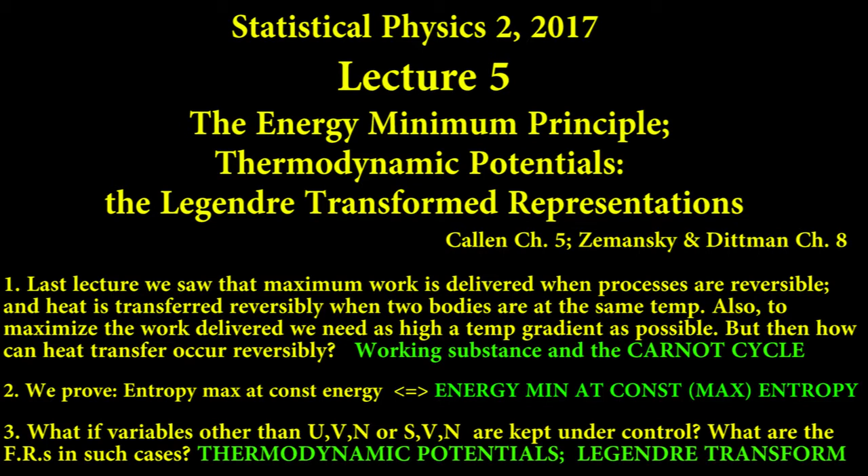Lecture 5 of our Introduction to Thermodynamics. Calling it an introduction, even though it's quite an advanced course. It's advanced in the sense that it's an advanced undergraduate course, but there's another level we could go up to, and there are a lot of interesting fundamental questions about thermodynamics that I don't really want to talk about in this course, because this is the first proper course in thermodynamics you're having. There are higher levels you can go up to, maybe 4th year level and grad school level, but you don't need that first off. What you need now is a nice orderly introduction that gives you the overview of thermodynamics, some feeling of how to use it, and some perspective.

So there are plenty of questions you can ask about almost everything we're doing, and thermodynamics is a very interesting, very difficult subject. Another thing is everything we're doing is equilibrium thermodynamics, and there are some very interesting recent results in non-equilibrium thermodynamics. Thermodynamics is alive and well as a research area.

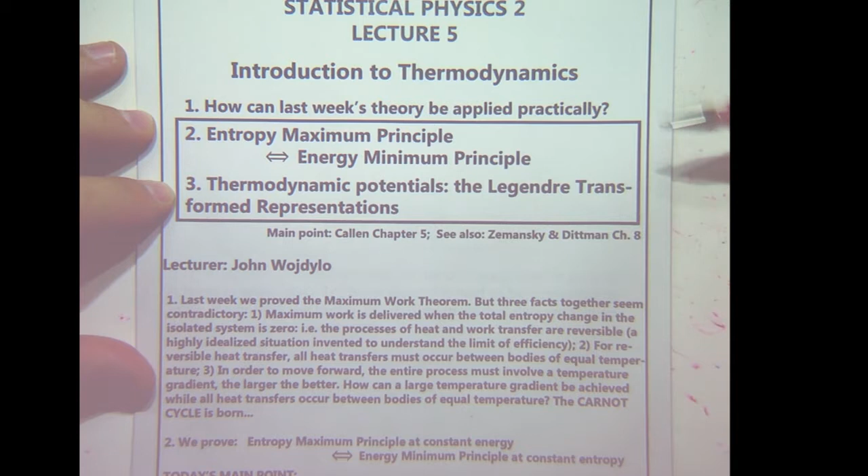So today we actually prove that, though we only prove it in one direction - the other direction, if you want to try it yourself, you can, but you just get the gist. The most important thing today, really fundamental for the rest of your working life in anything to do with thermodynamics, is thermodynamic potentials and the Legendre transform representations. So today we're doing Callen chapter 5, and for this first bit about last week's theory, there's an excellent chapter in Zemansky and Dittman on the traditional approach to thermodynamics from around the 1850s. That chapter also goes into Carathéodory's approach from 1909, which is highly non-traditional.

So just as an outline of today, let me talk about the first point. Last week we proved the maximum work theorem, but actually if you think about it, you might have thought there's something a bit strange happening, because there are three facts which, if you look at them together, seem to be contradictory.

Firstly, maximum work is delivered when the total entropy change in the isolated system is zero. What that means is that the processes of heat and work transfer that occur inside the system are reversible, where this idea of reversibility is a highly idealized situation invented to understand the limit of efficiency. So maximum work is delivered under reversible conditions.

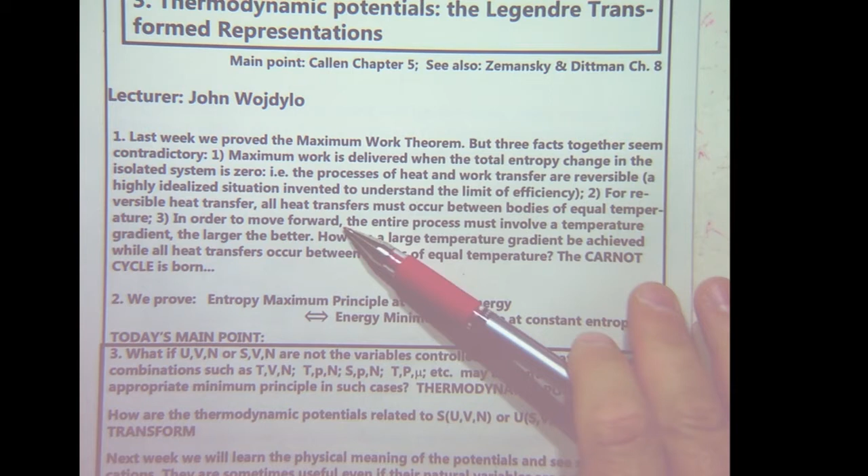The second point is, for reversible heat transfer, all heat transfer must occur between bodies of equal temperature or extremely close temperature - this idealized quasi-static transfer of heat. So, reversible heat transfer: we want maximum work to be delivered, so we want reversible heat transfer, and we want all heat transfers to occur between bodies of equal temperature.

And the last point is, if you just contemplated the efficiency equation we derived last week, you would have seen that in order to move forward, the entire process must involve a temperature gradient, and in fact, the larger the temperature gradient, the better the efficiency. How can a large temperature gradient be achieved while all heat transfers occur between bodies of equal temperature?

See, it sounds like a contradiction, doesn't it? So what's the way out of this? How do you solve this apparent contradiction? How do you resolve it?

Why is the Carnot cycle born? You've all done at least two thermodynamics courses so far.

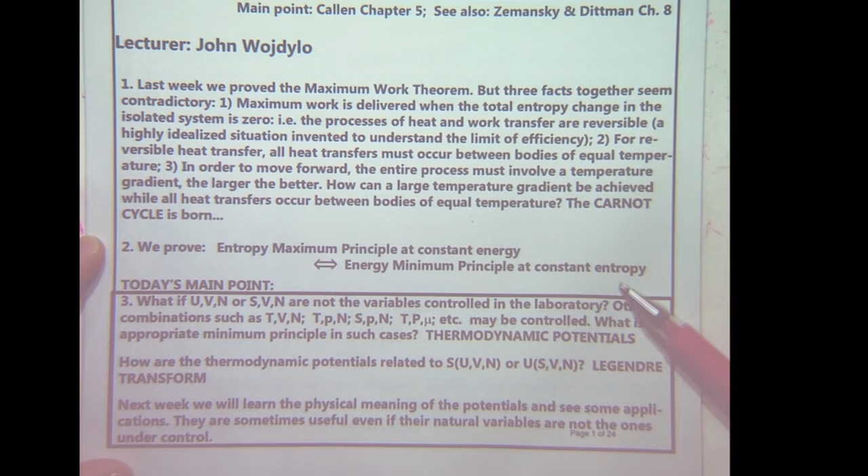Okay, so keep that in mind. Secondly, today we proved that the entropy maximum principle at constant energy is equivalent to an energy minimum principle at constant entropy. This is extremely important, and it's the foundation of the rest of this. The reason why all this works is this here, that there.

The important point today is: what if internal energy, volume, or number of moles of particles, or entropy, volume, or number of moles of particles, are not the variables controlled in the laboratory? What if some other combination is under control, such as temperature, volume, number of moles, or temperature, pressure, number of moles? If you do an experiment in the lab, this is the most common situation. This is also a very common situation.

Or entropy, pressure, number of moles, or temperature, pressure, chemical potential. This is also a common situation, because the chemical potential is often controlled by some kind of electrical field. You don't know any examples yet, but you will by the end of the semester, or in fact next semester, more next semester than this semester.

So what is the appropriate minimum principle in such cases? That's where the idea of thermodynamic potentials comes in. Professor, what do you mean by minimum? Minimum principle, energy minimum principle.

We know its initial state and we know its final state. In going between those two states, it delivers a certain amount of work to this idealized reversible work source, so there's no friction. We want a conservative system, like a Hamiltonian system. And here, there's energy delivered in the form of heat to a low temperature reversible heat source. So this is a hot body, this is a cold body. The reversible heat source is the condition that tells us what the temperature is going to be. Well, it's reversible.

In order for a process to be reversible, the total change in entropy must be 0. So heat must be transferred between the primary system and the reservoir when there is no temperature change.

There's still a contradiction, something missing in the picture. But there's nothing missing in the theory we've done. The theory we've done has ignored heat engines - we do not need heat engines to derive the big result.

But if you want to put the maximum work theorem into practice, like make the Industrial Revolution go better, then you need to put this into practice and think about heat engines.

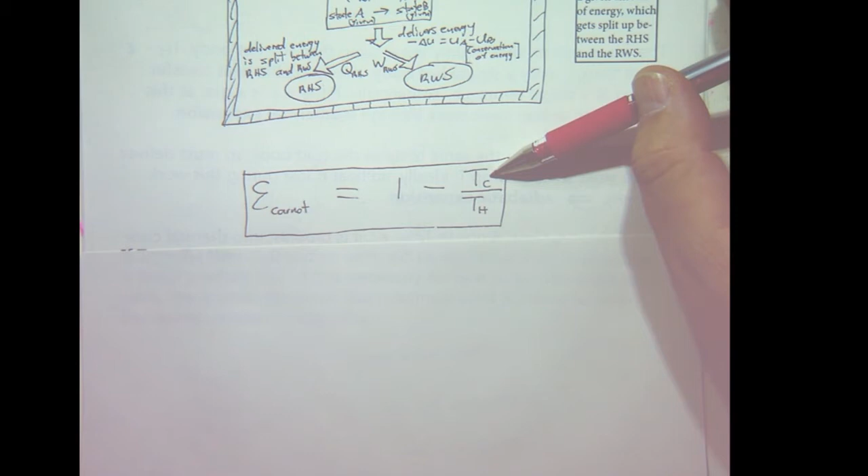So we derive the Carnot efficiency, and you see that if the temperature of the cold body equals the temperature of the hot body, the ratio is 1, and so the efficiency is 0 - it means you don't deliver any work. It's useless. But if the temperature gradient is big, meaning TH minus TC is large relative to TH, then you have a relatively large efficiency.

Okay, so as I've been saying, maximum work is delivered when the total change in entropy is 0.

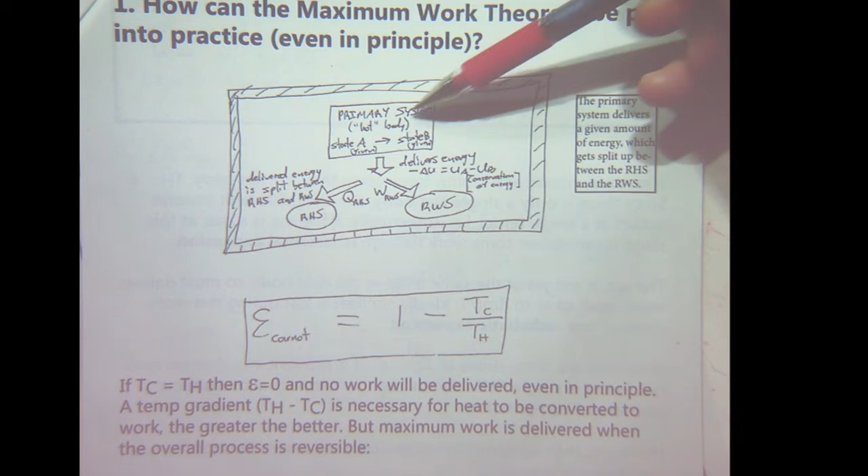How can the primary system deliver work maximally with its temperature decreasing after doing work? The primary system is meant to deliver work, so its energy decreases, and it's not drawing energy from anywhere - this is an isolated system.

While all heat transfers occur with two bodies at the same temperature for reversible heat transfer. But you just said that T cold and T hot are not the same - because the efficiency would be 0, and we actually want to transfer heat. So we need a big temperature gradient, yet we want all heat transfers to be between bodies at equal temperature. So how do you do that? But where did we get that point that they have to be of equal temperature?

Entropy change must be 0. And so the heat given - what we've seen is that there was an example last week where we had a hot body just put it in contact with a cold body in an isolated system, and the entropy is guaranteed to increase.

That's a challenge question, right? So if you just put that body in contact with that body, heat will flow, but there will be an increase in entropy, and there's no way you can make that reversible if there's a temperature gradient. So what do you do? What's missing?

This implies the existence of a third body or substance that acts as an intermediary between the hot body and the cold body. This substance is called the working fluid, or working substance, WS.

So what happens is that the working substance is initially at a slightly lower temperature than the hot body - we want this epsilon to be extremely small. Since there is only a single hot body, the reversible heat transfer occurs at a single temperature.

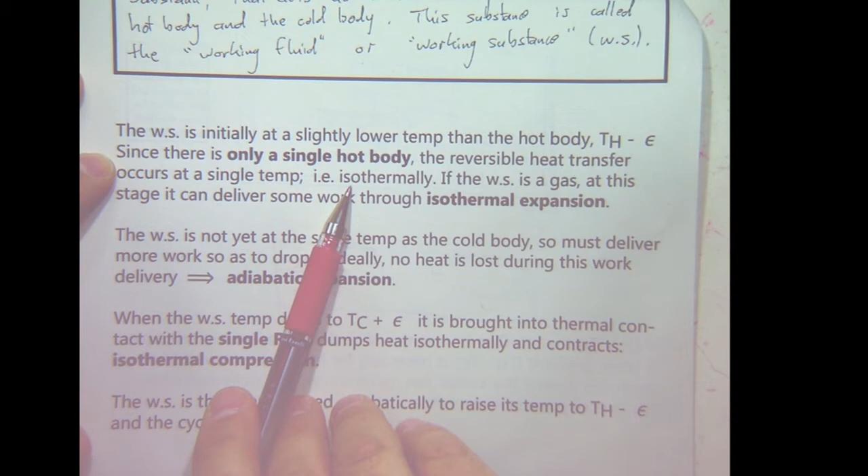And so it's isothermal. If the working substance is a gas, at this stage it can deliver some work through isothermal expansion.

So this substance, if it's a gas, let's say ideal gas, needs to absorb heat from the hot body, because eventually it's going to dump the heat into the cold body. That's the idea.

But if it's an ideal gas, then while it's absorbing heat, it will expand, and this expansion is able to do work. So in this case, there's an isothermal expansion.

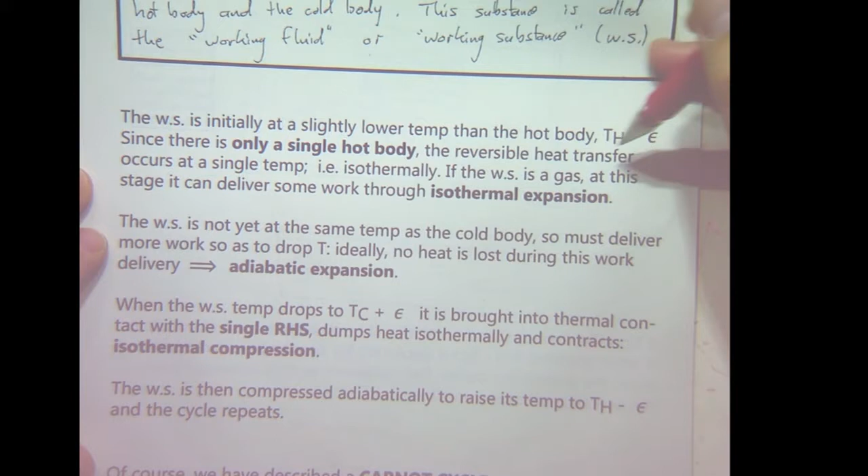Professor, why is it at a single temperature if its temperature is actually smaller than the hot body's?

I guess I'm saying the hot body is very large, so it's like a reservoir. Yes, the hot body must be large - it's assumed large, so its temperature doesn't change. So as long as the hot body is large, that means it's a heat reservoir.

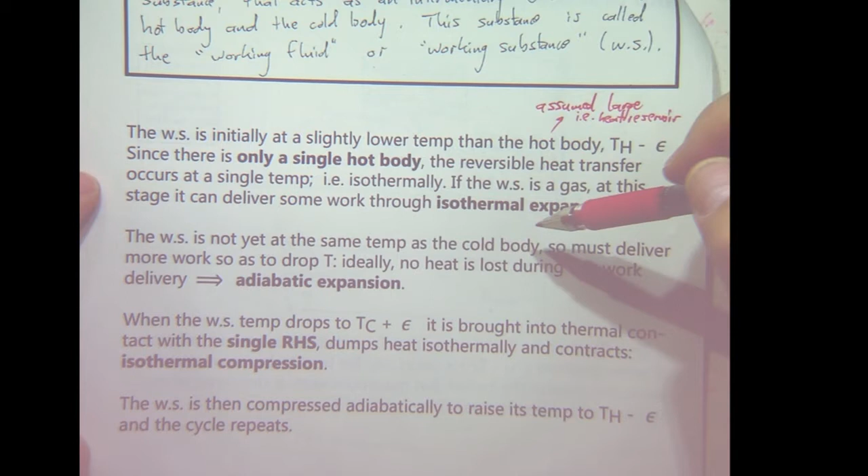Then the heat transfer occurs at a single temperature. And if it's an ideal gas, there will be isothermal expansion.

Now the working substance is not yet at the same temperature as the cold body - it has absorbed heat isothermally, and so in fact it's at the temperature of the hot body. So somehow its temperature has to be lowered. So how does it do that?

Well, it's got to deliver some work to drop its temperature, to drop its internal energy basically. But while it's delivering work, you don't want to lose any heat. So you want to use as much heat as possible and deliver it as work - you don't want to lose any heat. So in this step, you want an adiabatic expansion.

So you keep expanding adiabatically until the temperature reaches just very slightly above the temperature of the cold body.

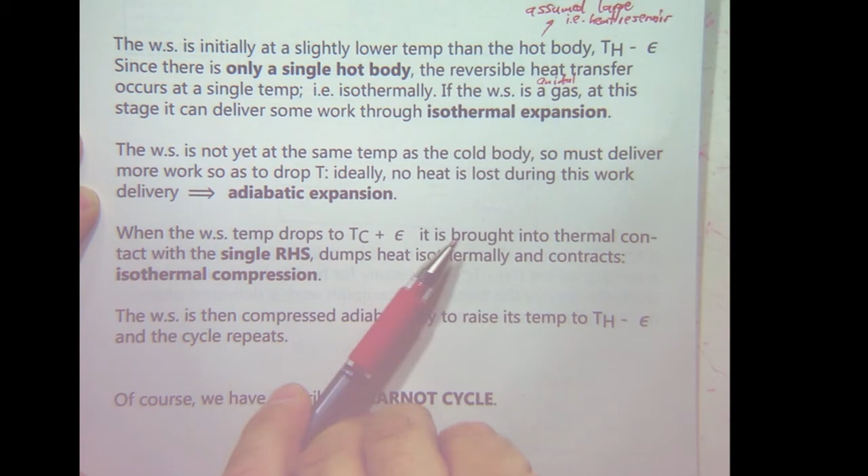You put the working substance in contact with the cold body, and it's a single reversible heat source, and let's say it's a large cold heat reservoir. So heat reservoir. The working substance dumps heat into the heat reservoir, but the heat reservoir is so big that its temperature doesn't change. So this happens isothermally, and if it's a gas, it would dump heat and it will contract. So you have isothermal compression.

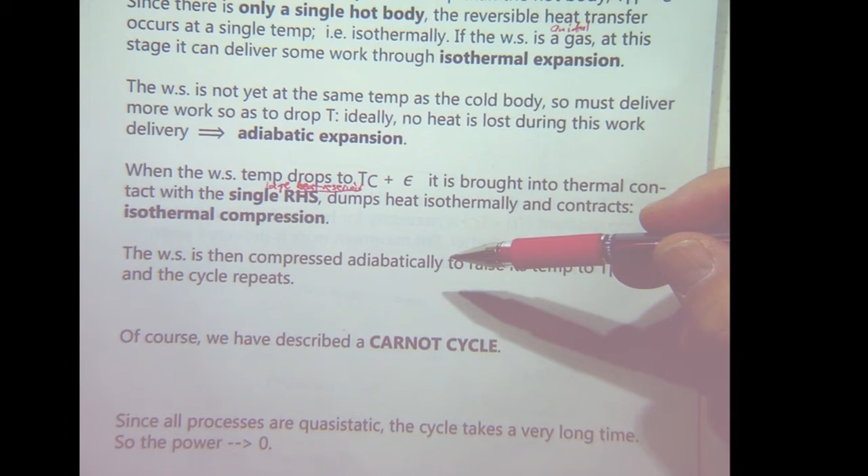And then the working substance is compressed further adiabatically to raise its temperature to the hot body's temperature. You've got to get the temperature of the working substance back up to the same temperature as the hot body, so you've got to do a little bit of work on it.

Can you explain again the process between the working substance and the cold reservoir? The single large heat reservoir, which is a reversible heat source.

Just assuming it's a gas, it's a PV diagram, sort of a gas of some molecules, an ideal gas. So it starts off at the same temperature as the hot body. This is isothermal heat absorption, and then it's got to drop its temperature to the temperature of the cold body, which will be down here. This is adiabatic, because you don't want to waste any heat.

Then you go up, isothermal. So it dumps heat in this step here - the working substance dumps heat into the cold reservoir. So the reversible heat source absorbs the heat from the working substance.

So it's a gas, so it will not expand. Oh well, you don't know what the reversible heat source is - it could be the environment, like the air. In fact, that's what it usually is.

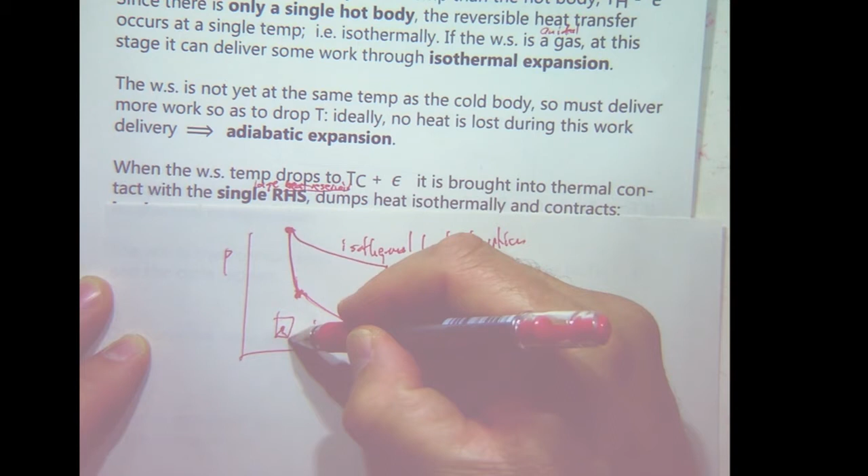Sorry, diesel - I think what happens with the diesel engine? It's been ages, I can't remember about engines, but I think the gas gets compressed and its temperature increases, and it's so hot that the spray just explodes. Yeah, that's diesel, whereas a petrol engine has got spark plugs. Yeah, I think it's something like that. I'm not very technically minded about motors.

Like, in a normal case, as you said, the reversible work system is the atmosphere or something? No, reversible heat source. So what's the reversible work source - is it the same as the working fluid?

It's like an idealized powertrain in your car. The cylinders go up and down, and they drive the crankshaft, and the crankshaft drives the axle or something, and the axle drives the wheels. If all that was frictionless, totally frictionless, it'd be like a reversible work source. The reversible work source is basically all the possible components that can do work, sort of lumped together in one conceptual unit. So this bit here, where the cylinder is compressed, would be a reversible work source, even though it's not the wheel.

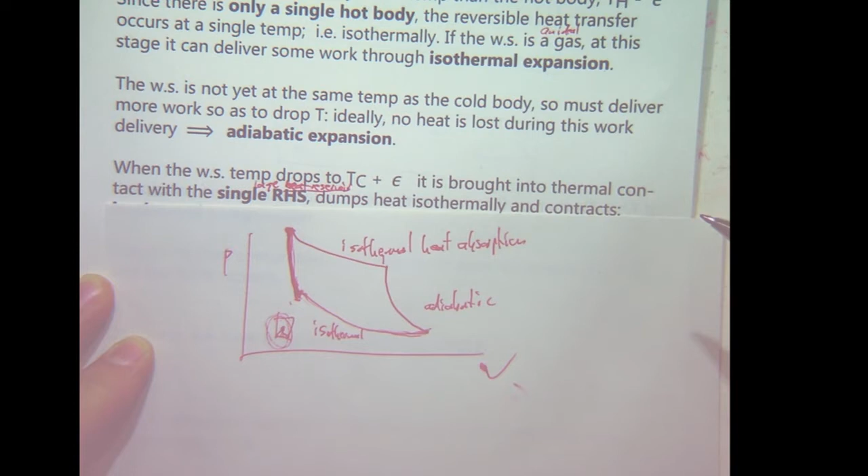And Professor, the adiabatic work that the working substance does, what does it do? On some machine, a cylinder or something? This one? Yeah. Well, it's expanding, so it's like a piston expanding - this is an expanding piston.

So it's delivering work - so it's the reversible work, in this case, delivering that to the reversible work source. As long as there's a positive, non-zero area enclosed, this is the work done - it's the area enclosed by the cycle.

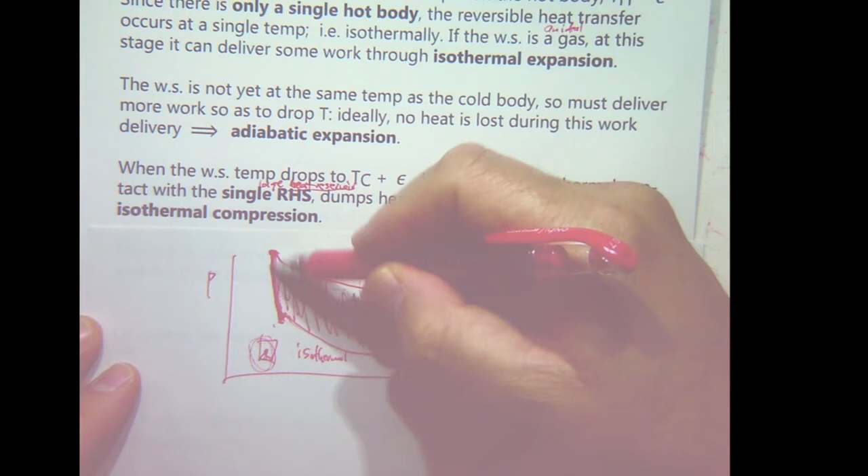So we have to do the compression - as in, we have to compress this one? Yes, this one. But yeah, something external has to compress the cylinder, for example.

So this is where... actually maybe it's a combination of the momentum of the car or something, and then... yeah, I'm not sure, I'm not exactly sure. There's many different ways of making it work. This is the principle, and there are thousands of ways, or hundreds of ways, of making it work. That's what these automotive engineering guys do.

Okay, and of course, what I've just described is a Carnot cycle.

If this was not a heat reservoir, if the hot body was not very big, or the cold body was not very big, then its temperature would change, and you would not have an isothermal process, but maybe some kind of other curve in the PV plane, not an isothermal.

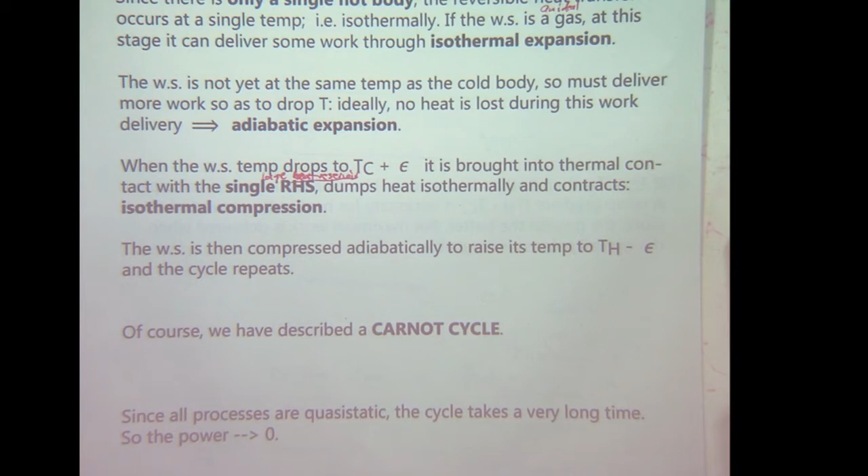And Professor, how do you know that the entropy change is zero plus zero? Because every heat transfer occurs at zero temperature difference there and there. So there's no entropy change in the isothermal process, and there's no entropy change in the adiabatic process because it's adiabatic.

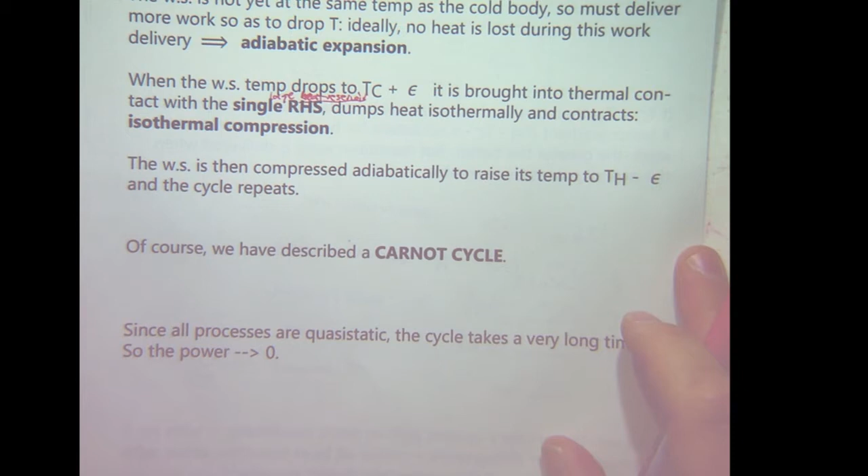So we use the working fluid to be able to have a reversible process. Because without the working fluid, the cold and the hot body would have to be in contact, which makes it irreversible. Without the working fluid, nothing would work. Nothing would happen.

Since all processes are quasi-static, the cycle takes a very long time, so the power tends to zero. You can't actually get any power out of the Carnot cycle. It's useless practically, but it gives you an upper bound on the efficiency. There are other more practical measures of efficiency, which you can look at in the end of that chapter, chapter 4 in Callen. It's really good.

So it's endo-reversible or something cycle. Efficiency of nuclear power stations, coal power stations, some other types. And it shows that nuclear power stations are actually really right up against the limit of efficiency. So there are more realistic measures of efficiency, which are important if you're into applied physics. It's very interesting stuff, good problems.

No, Professor, how do you know that the limit of the process is there, as in the quasi-static limit is defined? Because we said that the working fluid is at the temperature TH minus epsilon, and then we said that it's at the temperature TC plus epsilon, which is a bit higher, to approximate that the temperatures are together, so there's no heat transfer when temperatures are different. How do you know this epsilon doesn't really make a difference? It's designed that way. As in, is there such an epsilon?

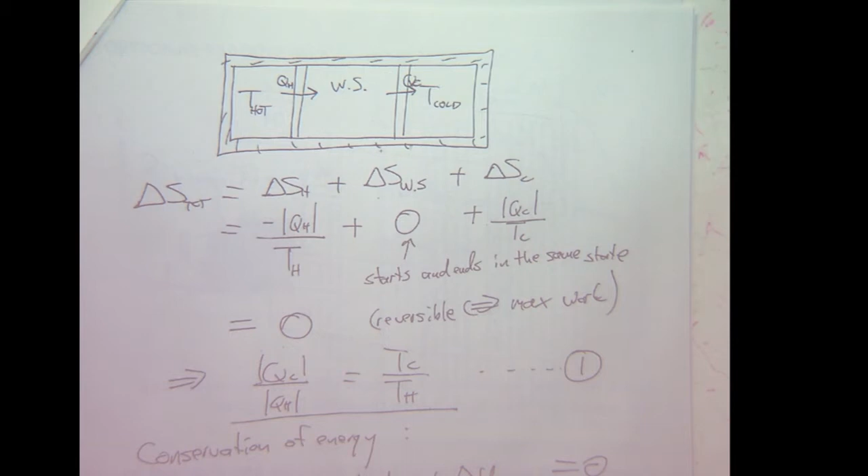All right, so here's an isolated system. Here is the hot body. It dumps heat QH into the working substance, and that and that are at the same temperature. And the working substance schematically dumps heat QC into the cold body, and this is a reservoir. So these are both reservoirs, so they're big, so they don't change temperature as they give up or accept heat.

So the total change in entropy is the total change in entropy of the hot body, plus the total change in entropy of the working substance, plus the total change in entropy of the cold body. Now, the hot body gives up heat, so its entropy change is negative: minus the absolute value of QH over the hot temperature, plus, now the working substance, and the cold body accepts heat, so that's plus mod QC over TC.

And now the working substance goes around in a cycle. It ends at the same state where it started, so its change in entropy is 0. Because entropy is a function of state, and if you start and end at the same state, you've gone around in a loop, meaning there can't be any difference. The difference is 0.

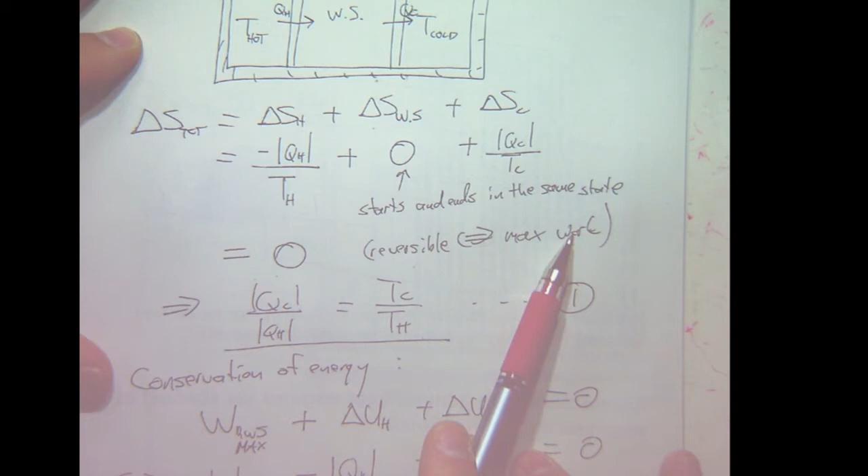And since everything happens reversibly, for maximum work, because we're under conditions where maximum work is delivered, the total change in entropy is 0. And that gives us an equation: mod QC over mod QH equals TC over TH.

And finally, conservation of energy. The work delivered to the reversible work source plus the change in internal energy of the hot body plus the change in internal energy of the cold body. But so that's the work delivered to the reversible work source minus the heat that's taken out of the hot body, plus the heat that's taken into the cold body.

That has to equal 0, because energy is neither created nor destroyed. So that tells us that the work is the difference between the heat given up by the hot body and the heat taken in, or the magnitude of the heat.

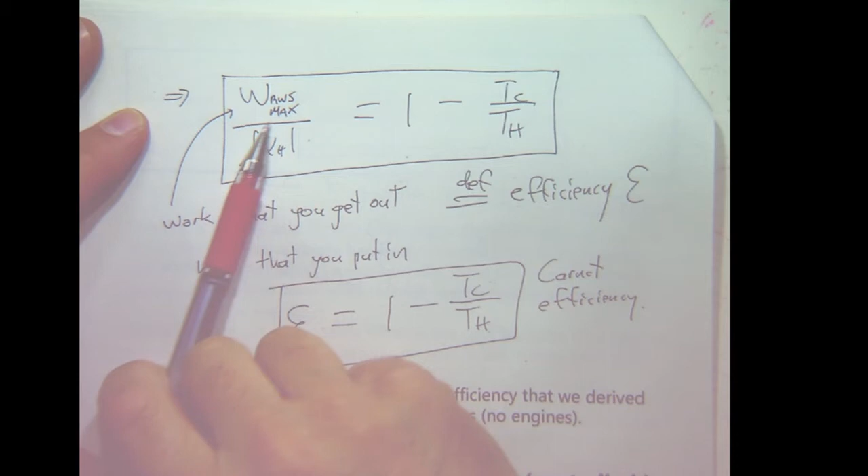So just manipulating that, you can check it out for yourself. You get this equation, that the maximum work delivered to the reversible work source divided by the heat that's given up is equal to 1 minus the temperature of the cold body divided by the temperature of the hot body.

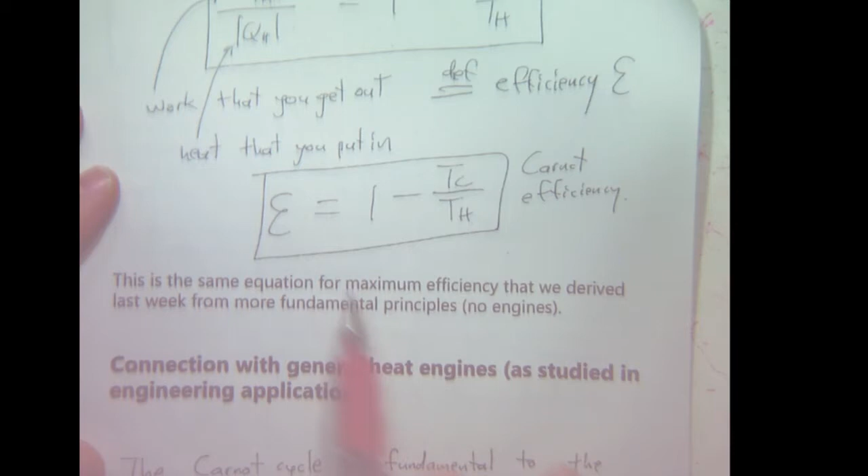Now, that's the work that you get out. That's the heat that you put in. So it's what you want over what you have to pay to get it. That's efficiency, because it's a good definition of efficiency: if you don't get much work and you put in a lot of heat, this number's small. On the other hand, if it's big, then you get a lot of work for less heat. So that's again the Carnot efficiency from a completely different angle.

The connection with general heat engines is that the Carnot cycle is fundamental to the traditional development of thermodynamics. Any quasi-static cycle can be decomposed into an infinite superposition of Carnot cycles whose thickness, the length of the isothermal legs, tends to 0.

So basically, here's an arbitrary cycle, say in the PV plane. There are isothermals and adiabatics, isothermal, adiabatics, like that. This is a large Carnot cycle. This is the actual thing that you're trying to approximate. If you make these smaller and smaller and thinner, you can cover this cycle in very narrow Carnot cycles, and all the math just works out.

I'm not going to do it now because it's not directly relevant to what we need to do, but if you're interested, it's very nice, it's a very nice result, it works out. You can just read these 2 or 3 pages from Zemansky and Dittman that explain how to construct that analysis.

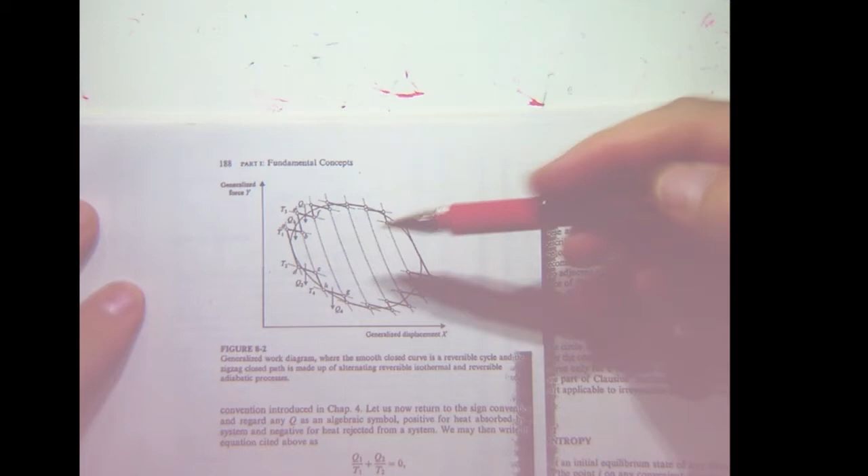Okay, here's the picture that I was trying to draw, and it turns out that it's a very nice result. You get that when you do that, the sum over the Jth heat transferred over the Jth temperature equals 0, and then as you take the limit as the number of these cycles tends to infinity, the sum turns to an integral, and you get that.

And then this thing here, it turns out, is the traditional development of thermodynamics. I think this was by Clausius around the 1850s. And so you get that, and this was defined as the entropy. I think he came up with that word. This is very interesting, but it's a little bit beside the point from what we need to do.

So what I want to do is get into the energy principle, the energy minimum principle. Up until now, we've seen that for an isolated system in equilibrium, the entropy is maximized at a constant energy. Why is the energy constant? Because it's an isolated system. So the entropy is maximized subject to the condition that the energy is constant.

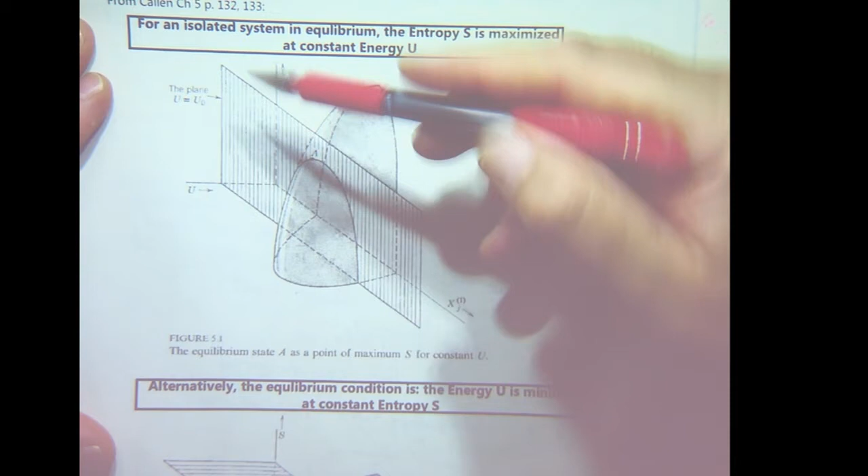So if this is the entropy surface, here is the entropy we're plotting. This is a graph of the entropy function, where entropy is a function of the energy, and here is just one other extensive parameter. If the energy is constant, and you pick a number, the total energy of the isolated system is there, and there's a plane that passes through that point, or hyperplane in general, and that intersects the entropy function, and it is some curve here. This is very idealized, but the surface can be quite complicated, but it doesn't matter, it's the idea.

And then subject to this condition that the energy has to be this, the system, when it's in equilibrium, finds the point where the entropy is maximized, subject to this condition.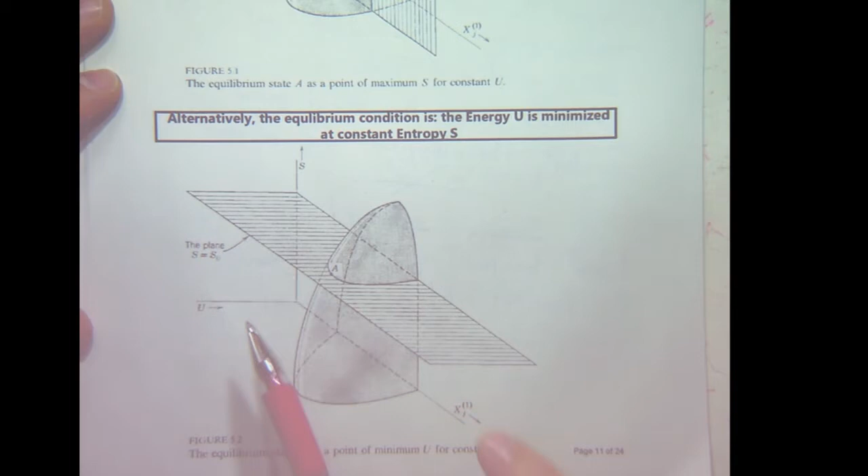Now, what we want to prove is that, alternatively, the equilibrium condition is this: at constant entropy, in other words at the maximum entropy, because entropy has to be maximized, if you take that maximum entropy value, and under that condition you minimize the energy, then there's a value of entropy which passes through that same point. That's the maximum entropy point there. And now there's a plane that passes through that point, that entropy value, and it intersects the entropy surface like this.

There are many accessible energy values in general, in the sense of conservation of energy, but the system minimizes the energy. So to minimize the energy, this is towards negative energy that way, and towards smaller energy that way. Here the energy is minimized. What we want to do is go from this way to that.

Perfect. But last time you said that all the points on this surface are equilibrium points. Yeah, they are. But then why does it choose the point that's the top for the energy if all of them are equilibrium points? You mean this one? Or this one? Which one? This one? The top one? Yeah. We said that the entire surface is equilibrium points.

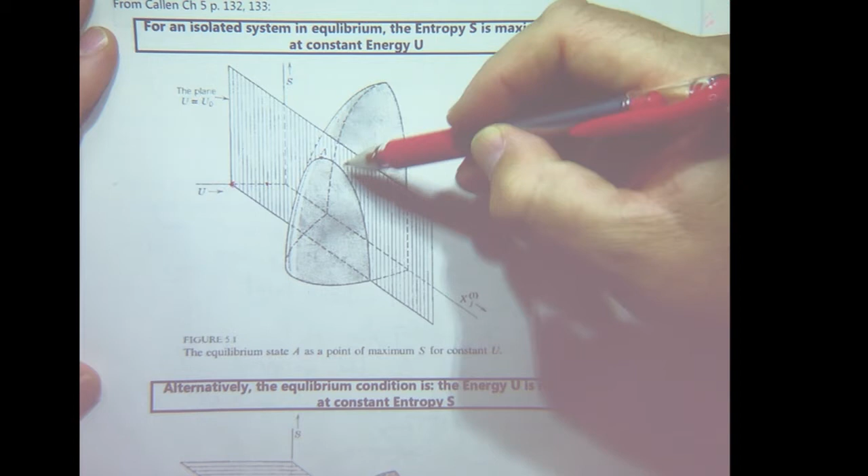So these are equilibrium points, but under different combinations of U and the extensive parameters. So given the conditions, the system, when it reaches equilibrium, finds one of these points. So each of these points is a maximum for a certain U? Yes, yes. But then we can see that there's only one per plane. Per one value of constant U, there's only one S. So there is no dependence on the extensive parameters.

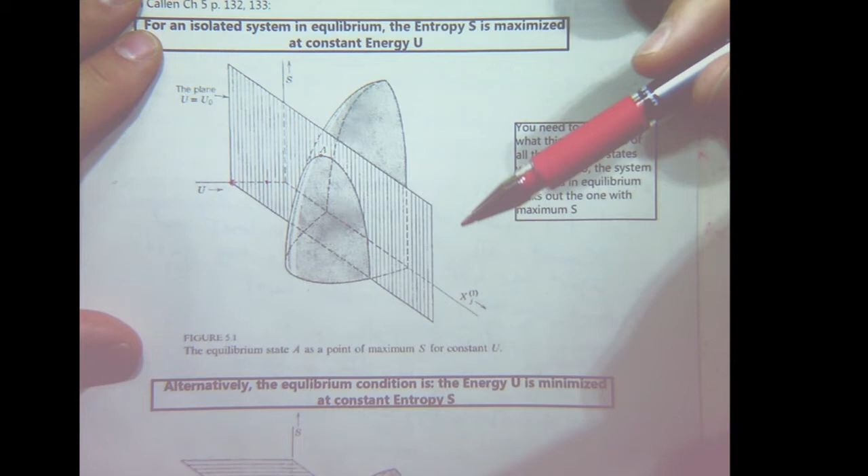The extensive parameters that are chosen. This is just one—there could be many extensive parameters. So suppose the one that is chosen are such that that point is highest. But don't we control the extensive parameter and U? So we control it and fix that state. Let's say we fix that. No, this is a composite system.

So this is back to, for example, you have two subsystems with many possible combinations of x1 and x2, and any one of them satisfies the energy condition. So go back to, depending on the temperature, go back to the first assignment—I think the third question of the first assignment, where you have the two subsystems. That's what's happening here.

So these are not equilibrium points. There? These are—right, they are. Every point on here is an equilibrium point, but they're energy conservation points. And an equilibrium, in order to be plotted on here, you've got an equilibrium point. But then if it's—there's only, under these conditions, only one that maximizes entropy.

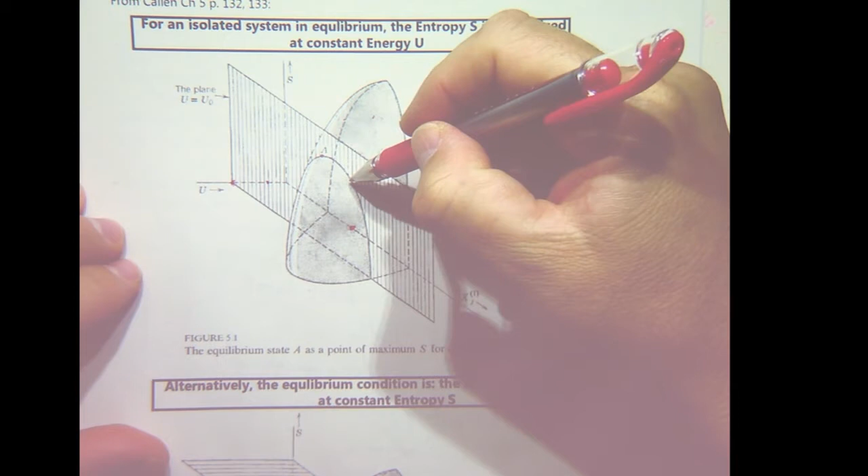So if I have two subsystems divided by a wall that's impermeable and adiabatic and everything, I can be there. I take the wall away, the system ends up there. That's what's happening. So everything is subject to the constraints—right, to the constraints. So it's the maximum entropy given the constraints. Correct, not for free. Of course, otherwise I'd keep going up there somewhere.

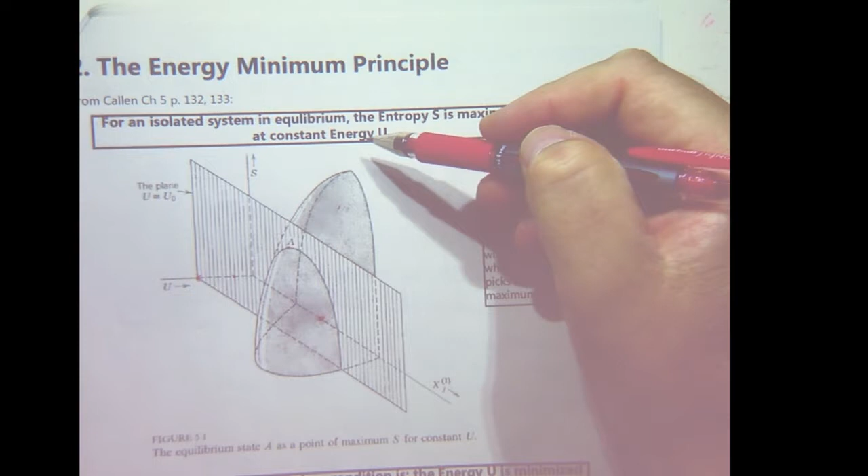Okay, so theorem: in an isolated system in equilibrium, the entropy is maximized at constant energy U if and only if the energy is minimized at constant entropy S. Let's see why this is so.

So this proof is a physical argument, right? I think it's always very useful to understand or be able to prove things using a physical argument before you get into a mathematical argument and get lost in symbols. So let's have a look at the physical argument, but we'll only go in one direction: prove that given the entropy is maximum, then the energy must be minimum.

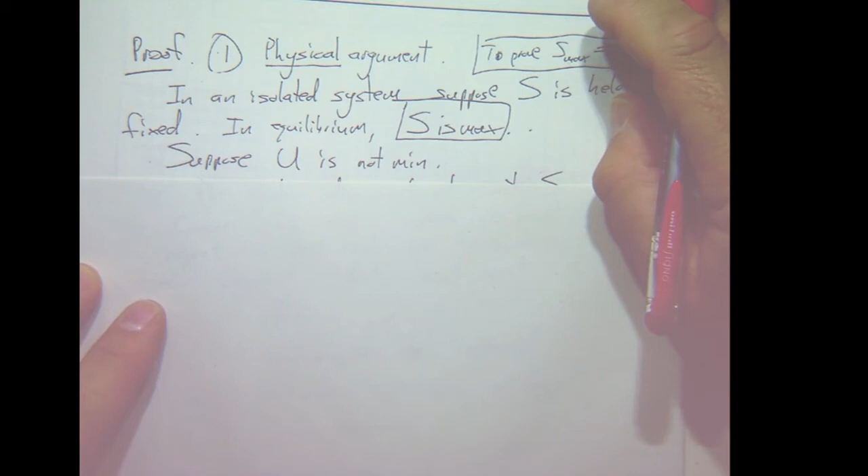So in an isolated system, suppose the entropy is held fixed, and in equilibrium, the entropy is maximum. Suppose that the energy was not a minimum. So let the system do work at constant entropy. Convert all the work into heat and pump the heat back into the system. So the energy remains constant, because the final energy is the same as the initial energy—you've got an amount of work and you've converted it all into heat and pumped it back into the system. So there's no change in energy, but the heat input, done quasi-statically, so this is true.

The heat input causes an increase in entropy, but that contradicts the assumption that the entropy was maximum. So, if the entropy was not maximum—suppose the entropy is maximum, if the energy is not minimum, then we could lower the energy by letting the system do some work. Then you convert that work into heat using any contraption and pump it back into the system. And then the entropy of that system must increase. But that means that the entropy wasn't a maximum.

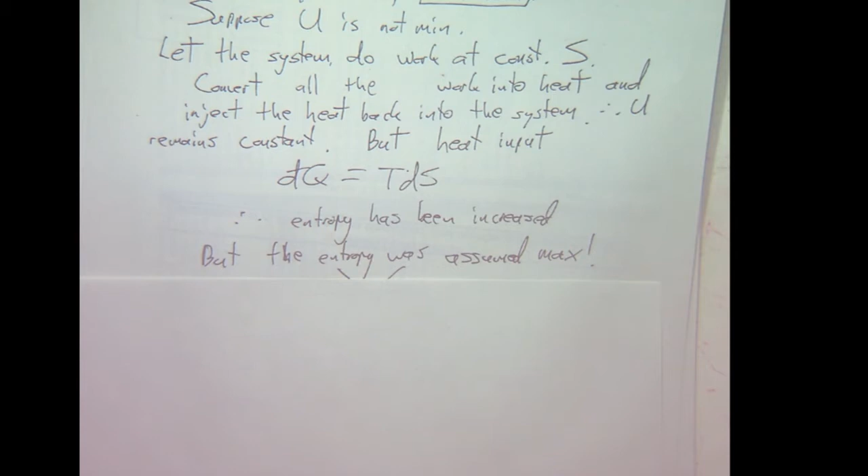But it's not necessary to convert all the work into heat, right? No, but yes it is, because you want the total energy after to be equal to the total energy before. To convert all work into heat it is possible, like current. Heat into work? No, the opposite. So the physical argument has proven that maximum entropy implies minimum energy under conditions of constant U here.

Under conditions of constant S there, you need to go the other way. It's problem 5.1.1, it's just optional. You don't have to do it, okay? But you can try if you want.

Now, mathematical proof. So we proceed in the same direction as in the physical proof: S maximum at constant U implies U minimum at constant S. And we leave the reverse direction as an optional exercise.

So let's get some orientation before we dive into the symbols. Let's think about it. We assume that the entropy is maximum at constant U, so it means it's concave down. In high school, I always thought of it as concave down if you have a maximum, just means that the second derivative in any direction is negative, in all directions.

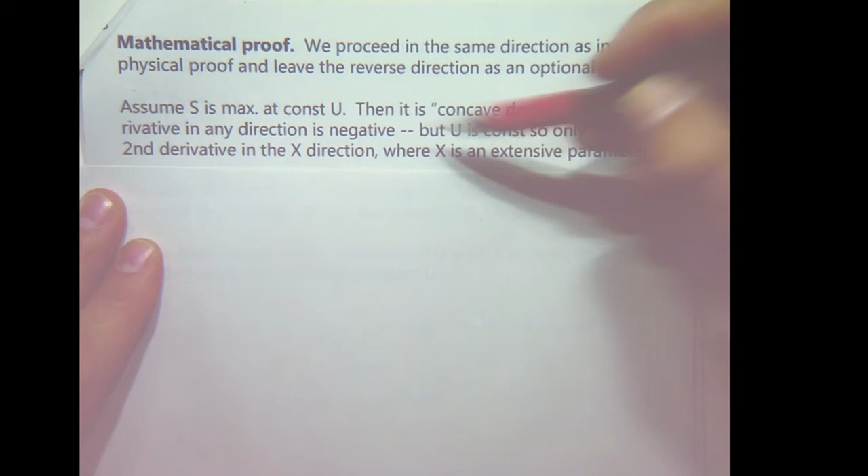But the energy is constant, so we only need the second derivative in the x direction, where x is an extensive parameter. In fact, it's in all the xi directions, all the directions of all the extensive parameters, but we just choose one of them. So we want to use the fact that the second derivative in the direction of x of the entropy function is negative, to show that the second derivative of the energy in the direction of that same extensive parameter is positive.

So then it's concave up. We want to use that second derivative and end up with this second derivative, or the other way around, we want this second derivative and derive that one. That second derivative is going to be negative, and we must get a negative to give a positive. That's what we're aiming for. That's the direction that we're going to go in our proof.

Okay, so we know what we're doing. We must convert a second derivative of U with respect to x at constant s into a second derivative of S with respect to x at constant U. So we've got to do some gymnastics using the identities we proved in the first lecture. Let's do it.

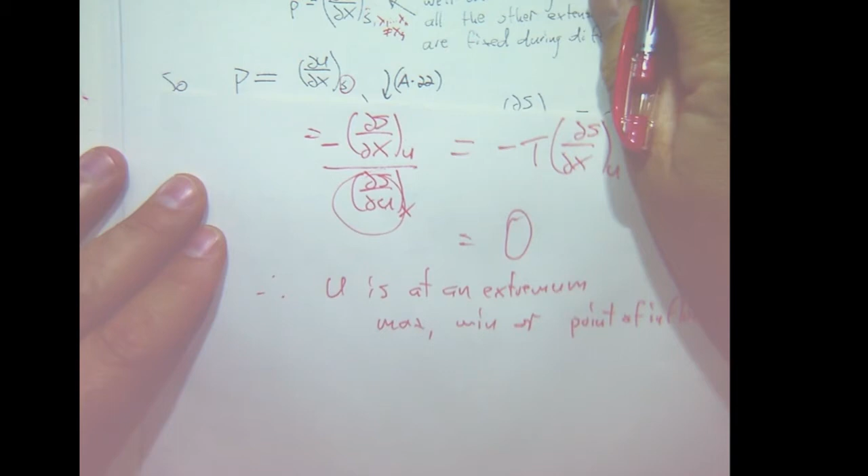Right, so what we've got to now investigate is a second derivative of u. So what we need is d2u by dx squared at constant s. We need to investigate that. And that's dp by dx at constant s.

Now, again, we want derivatives with respect to s eventually. So now consider p to be a function of u and x. The reason why is that then eventually we're going to have derivatives of s with respect to u. We're putting in u as one of the variables instead of s, because eventually we want derivatives of s with respect to u. So we've got to make sure that we express things in terms of u. That's why we do this step.

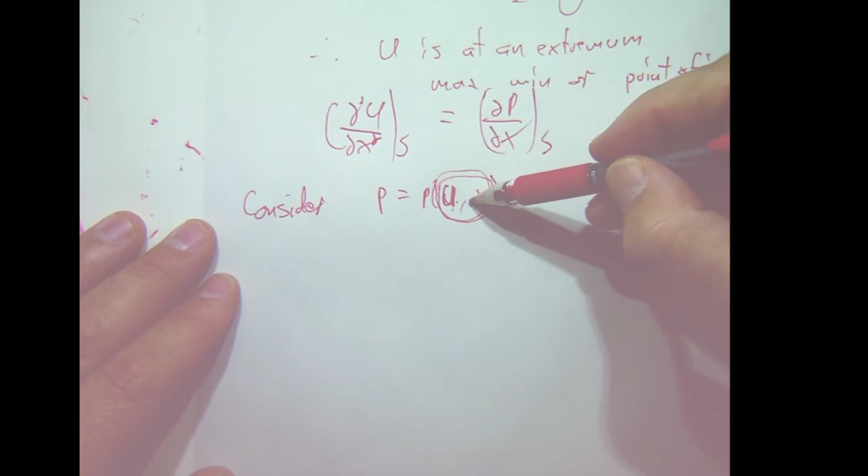So now dp is just dp by du at constant x, du, plus dp by dx at constant u, dx. And this is all happening at constant s. There's a condition that's always there in the background, that we're working under.

So now, what about the total derivative of dp by dx? Well, that's dp by du at constant x, du by dx -- this is supposed to be du, yes -- plus dp by dx at constant u, dx by dx. And this is now du by dx at constant s.

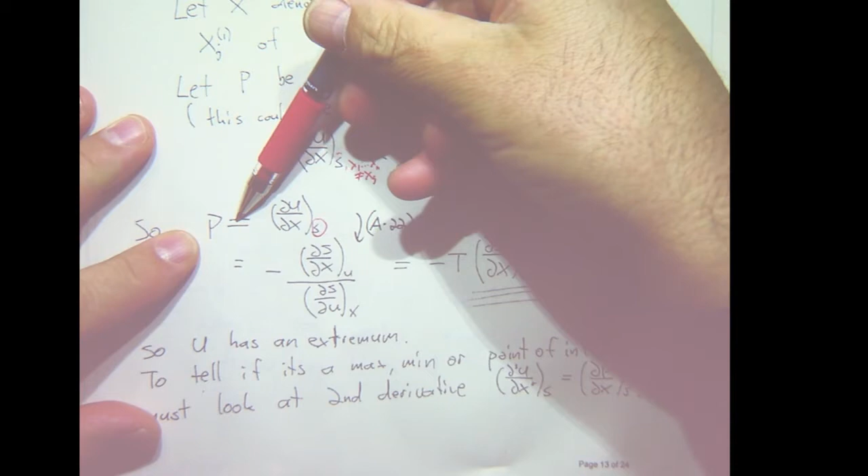And what we want is to introduce the entropy. But we saw here that P is that ratio there. So what we've got here, we've got d by dx of P at constant U. So here we've really got minus dS by dx at constant U, over dS by du at constant x. Is that okay? Yeah.

So, because that's P, and that's what we had, we already did that bit there. So now we've got derivatives with respect to S, which is what we want. And also we've got first derivatives with respect to S there, and another derivative of all that. So we're going to get second derivatives with respect to S, which is really good. We have a constant x and a derivative with respect to x.

Yes, because this thing here is a function of U and X. But even if it's the derivative at constant X, it's still a function of U and X. And then this is a function of U, that's a function of U and X, and that's a function of U and X. And this is d by dx of that, so I need to use the product rule. Okay, so what you get, use product rule.

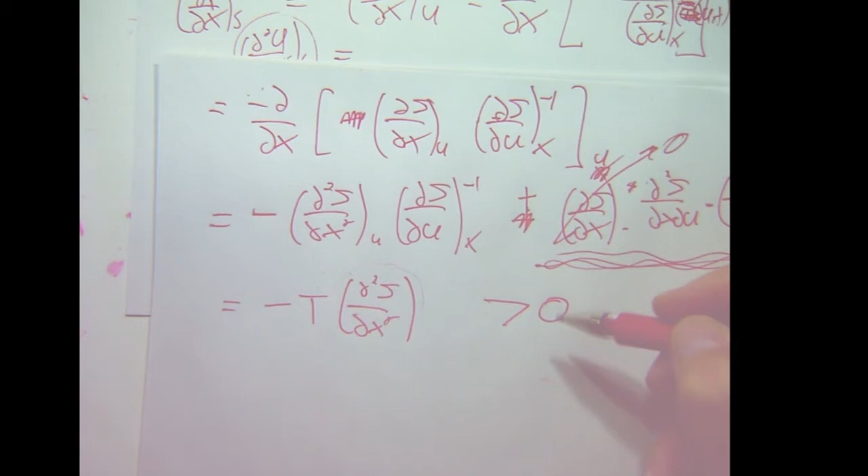What can we say about that, concretely? S is a maximum, so this second derivative must be negative. Temperature is positive, so negative times negative makes this a positive quantity. So u is concave up — what we've just shown is that d2u by dx squared at constant s is positive, concave up, and x is arbitrary.

X is an arbitrary extensive parameter, excluding s. So therefore u is a minimum. That's the mathematical proof in one direction.

You can see how we try to make sense of the direction of where we're going mathematically. We started with the derivative of energy with respect to an extensive parameter, and we want to introduce the derivative of entropy with respect to an extensive parameter. That's it.

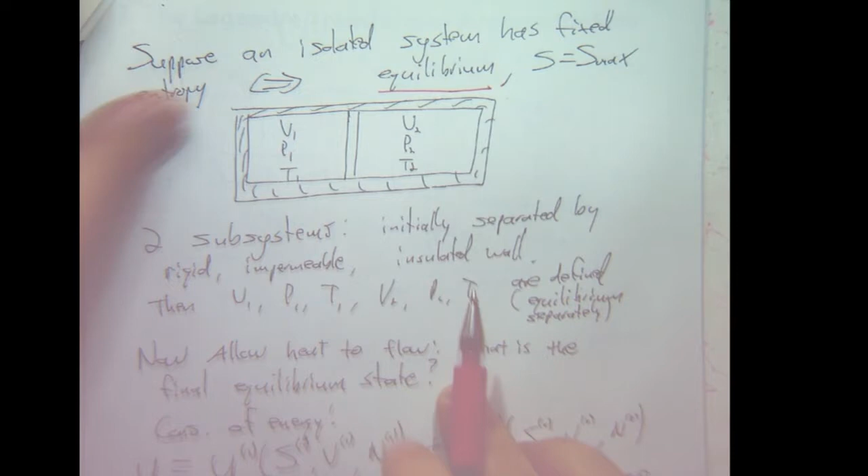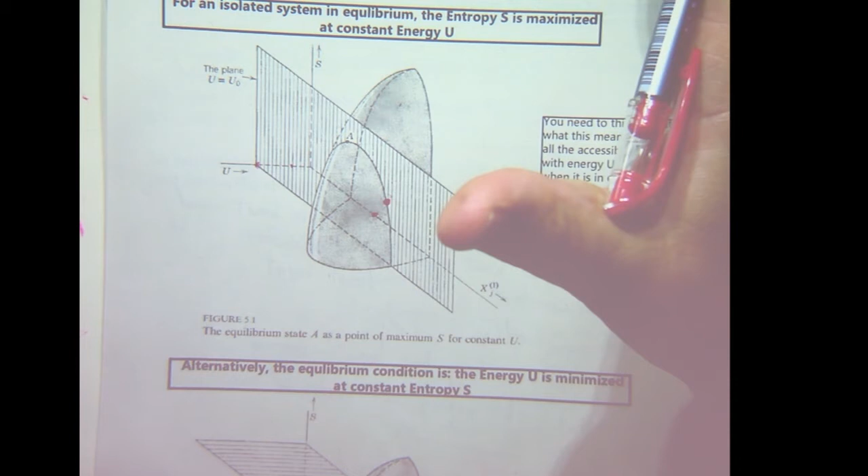Then you replace the adiabatic wall with a thermal wall that can transmit heat. The system readjusts itself, the entropy climbs up at the same total energy, and the final equilibrium point is here. Initially the entropy was down here somewhere, and the system rearranges itself spontaneously without any outside help. In any spontaneous process the entropy must increase, so it goes up like that, ending at the maximum possible. When it gets up here, it can't rearrange itself anymore — that's an equilibrium state.

And it's in equilibrium — that's where it has to be given those constraints. Take those constraints away, and it rearranges itself spontaneously, the entropy increases at that same constant energy, and ends up there. But it's not really at the maximum entropy — well, it is, that's the maximum entropy given that this constraint is there and the other dimensions are sort of fixed.

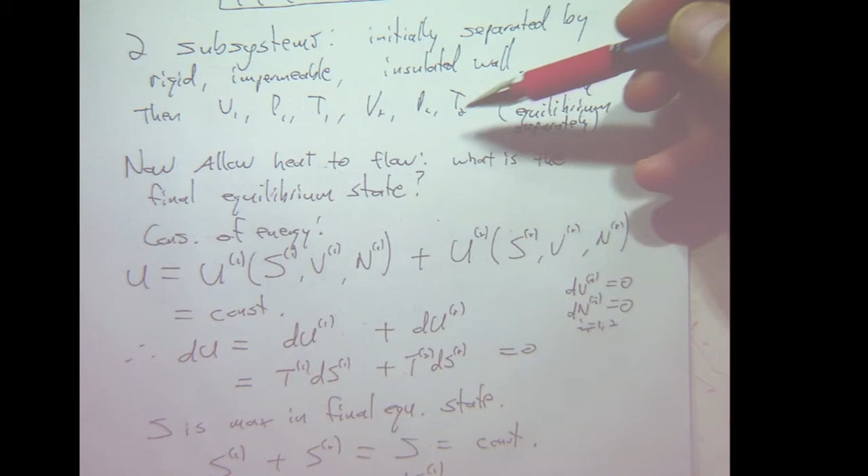Before we were using the maximum entropy principle to get our extra equation. Now we're using the energy minimum principle to give our extra equation.

Conservation of energy gives us that the total energy is energy of the first subsystem plus the energy of the second subsystem, which equals a constant. That means the differential of the total energy equals du1 plus du2, with all the other conditions: dvi are 0, dni are 0. Now there's no volume change, no work being done, so the entire internal energy change is due to quasi-static heat transfer, so it's T1 ds1 plus T2 ds2.

And that's got to equal 0, and that gives us a relationship. Now S is a maximum in the final equilibrium state, so S1 plus S2 equals S, so ds2 equals minus ds1 from there.

So ds2 is minus ds1, so we factorize the ds1, and we get T1 minus T2 times ds1 equals 0. That's for arbitrary ds1, which means that T1 minus T2 must equal 0 - this coefficient must equal 0. So T1 equals T2 must be the equilibrium condition.

So we derive the same equilibrium condition as we derived using the entropy maximum principle. Obviously, for all the other situations like particle transfer, volume transfer, you get the same condition. They're equivalent.

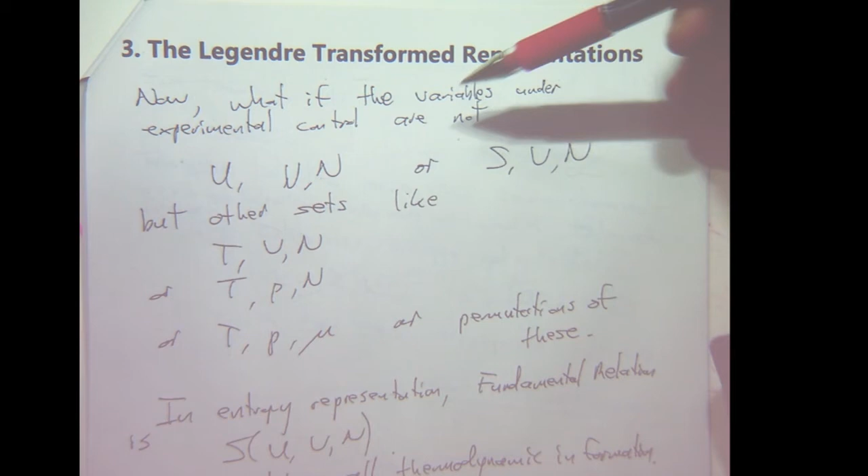So the main part of today, the most important part, is the Legendre transform representations. So what if the variables under experimental control are not U, V, N or S, V, N, but some other set like T, V, N, or T, P, N, T, P, mu, or some permutation?

In the entropy representation, the fundamental relation is S as a function of U, V, and N. Now this contains all the thermodynamic information about the isolated system. What about the function S as a function with the variables T, V, N? Does that contain all the information? Why or why not? T is a function of U, V, and N in general.

So I guess it would still contain information. Anyone else? There might be a redundancy. What's T? What's the definition?

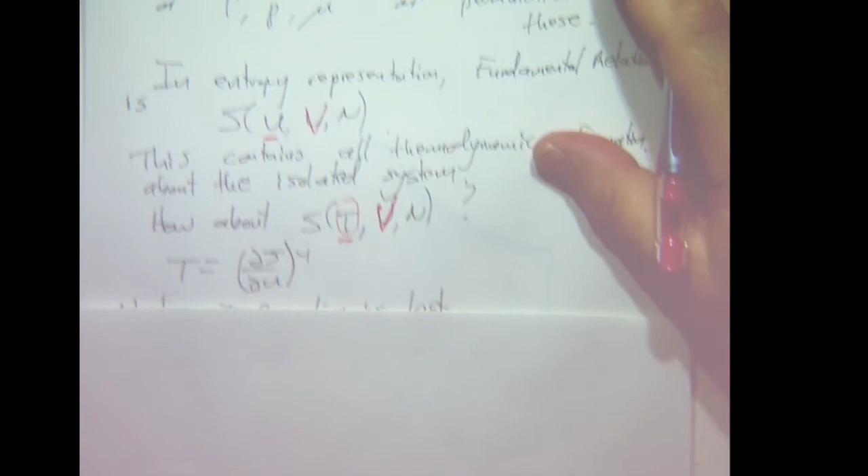Just to give you an example, let's have a look at f of x, y equals x plus y. What if I replace x with df by dx? Now df by dx is 1, so everywhere where you see x, you put in 1. So now the function f as a function of df by dx and y is just 1 plus y. But wouldn't the function and form change?

No. I'm replacing this variable by the derivative of the function with respect to that variable - way different, and you've lost a heap of information. But it just simply isn't the case, is it? As in, this is not what f is. It is, yeah.

So if I just replace U with T - obviously if I have the energy equation of state, the thermal equation of state, for example for an ideal gas, U is C N R T. Then I can invert T and put U back in, and that's equivalent, that's the same thing. So this plus U as a function of T, this equation of state, those two equations together contain the same information. But if I don't have that equation and you just give me S as a function of T, V, N, you're not giving me all the information - because when you're integrating back to find S, there's a constant of integration.

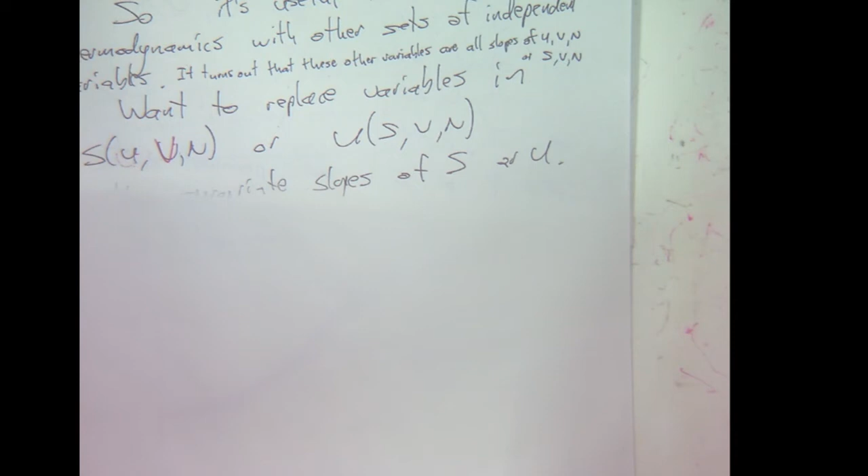So when I get to the idea of Legendre transform, what we want is to represent a function in a different way, such that the process is natural and works well. We're going to represent the function in a completely different way, a completely different concept.

So let's suppose we have y as a function of x. The graph of the function looks like that. What does it mean when we say a graph? To any point x, we associate y of x. So that point there is the point x, y of x, that point in the plane. And point-wise, I do that for every x, and I get a curve like this. That's how we build up the graph of the function.

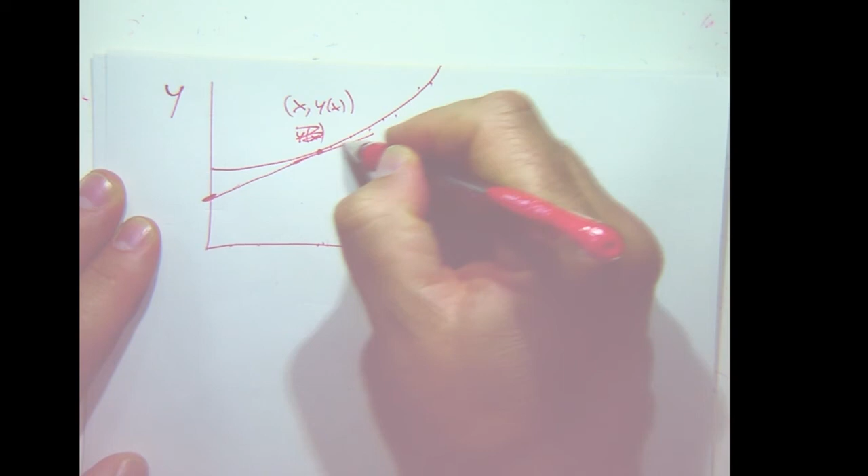But there's another way we can specify this curve. What if at any point I take the tangent at that point? I need one more number to specify that uniquely, so I specify the intercept with the y-axis. So that number, if you give me that point and a slope, I know I need to start from here and head out in this direction, and I just have that line there. Now, you give me that point and another slope, and I'll head out in that direction and have that line there—that point and another slope, that line there.

And if you give me, for every point along here, a slope, then I can make an envelope—put all of these straight lines together, and the envelope of all of these will be that curve. What do you mean by envelope? In this case, you just put all the lines together, and what's above, that's what you see here.

So that there is another way of describing that curve. But what we've done now is we've got a point and a slope. And since what we want to do is replace variables with slopes, then maybe this is the right way. This might have something to do with it.

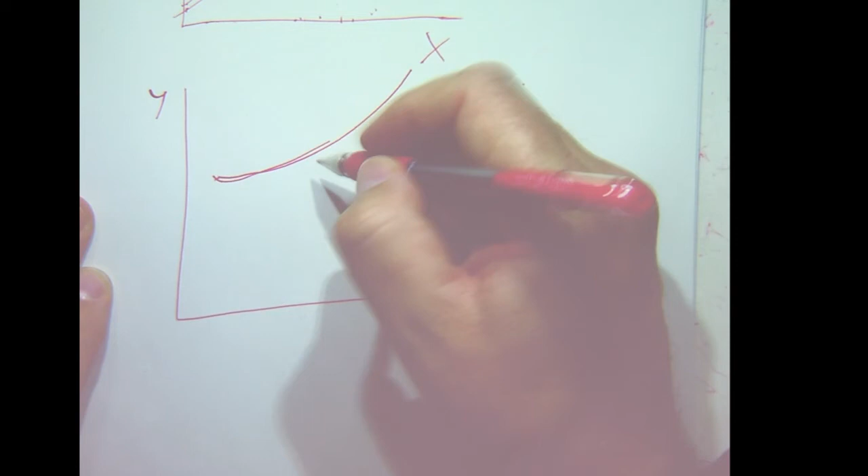So there's y and x, and there's some curve, like that. So there's an xy point—specify an xy point, suppose we're interested in that point. Now that point has a tangent to the curve. And let's say this point here is the point 0, and let's say it has some value psi.

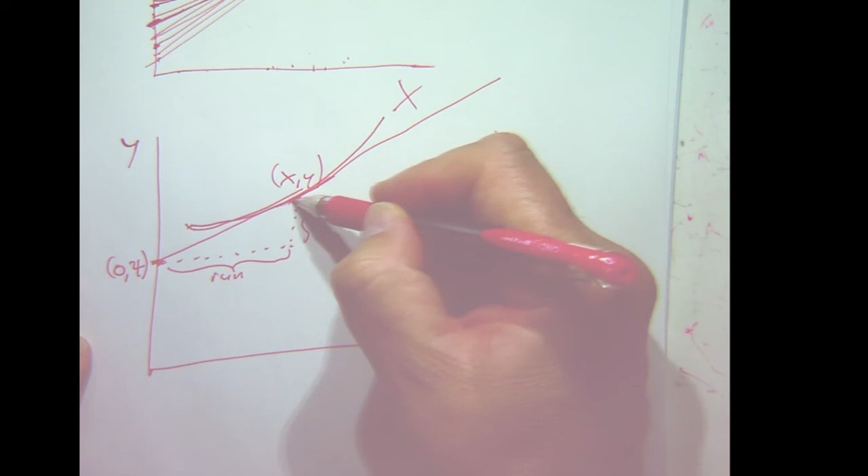And then this is the rise, this is the run. The rise over the run is—well, what's the rise? It's the y value there, which is y, and the y value there, which is psi. So it's y minus psi over the run. The run is the x value there minus the x value there, so it's x minus 0. And we just define that to be the quantity p.

So the first equation is, we'll just isolate the psi. We want psi equals—put x over there, so we have px. As px minus y, but that's minus psi, so psi is y minus px. And that p is the slope of the tangent.

And so this is called the Legendre transform of y, because we're subtracting the slope with respect to x times the value x at that point. So what this does is, now that's a given number, so it converts a description of a function from 'y is a function of x' to the description 'psi is a function of p,' where p are these slopes. But then we still have the x.

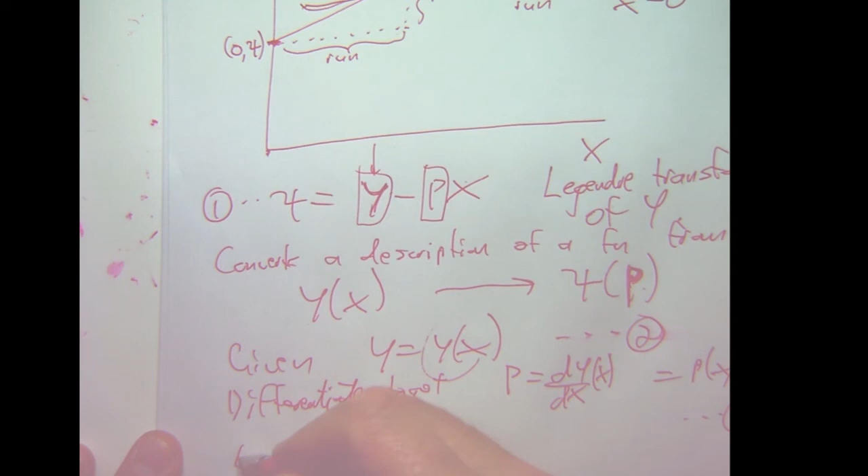So what you do now is eliminate x and y from there to get psi of p.

So where's this side? You see, we're given y of x, and you take the derivative and you get p of x equals that function of x.

So what if you invert this? You get x as a function of p. You put x as some function of p in there. You get p times p squared or something.

And then y is a function of x, but x is a function of p. So you have y as a function of x as a function of p. So this is something like p cubed minus p or something. So you've only got p's left in here, p's left in there, and p's left in there. So you get psi as a function of p. Okay.

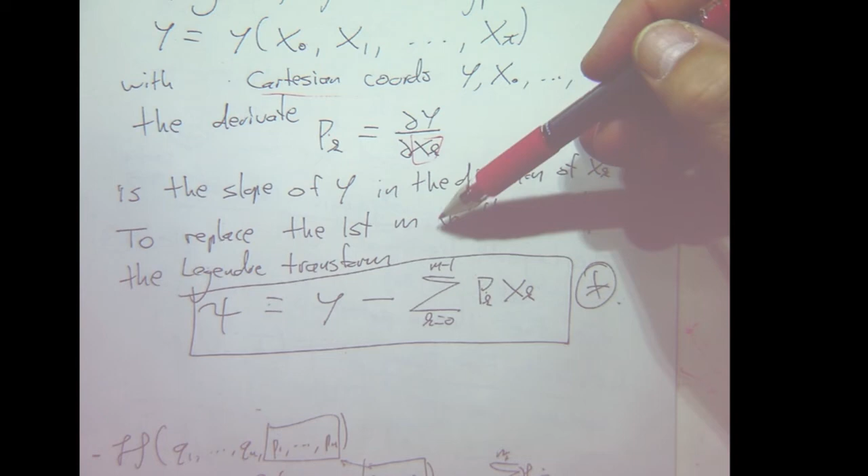To replace the first m variables, you apply the Legendre transform. So there's the function y that you started off with, and you want to replace the first m of these x's with m slopes, with respect to these derivatives, with respect to these variables. Derivative with respect to y with respect to x naught, y with respect to x1, y with respect to xm, or m minus 1. Okay.

So then you subtract from y the sum, from k equals 0 to m minus 1, of the kth slope times the kth variable. And so then you get psi as a function of the slopes, plus the remaining variables. Okay?

Right. So an example that you know: minus the Hamiltonian - I've got it the wrong way around, so minus the Hamiltonian - is the Lagrangian minus the sum from k equals 1 to the number of phase space coordinates, or the dimension, number of q's and q dots, which is the number of p's, times the derivative of the Lagrangian with respect to qi dot, qk dot, times qk dot.

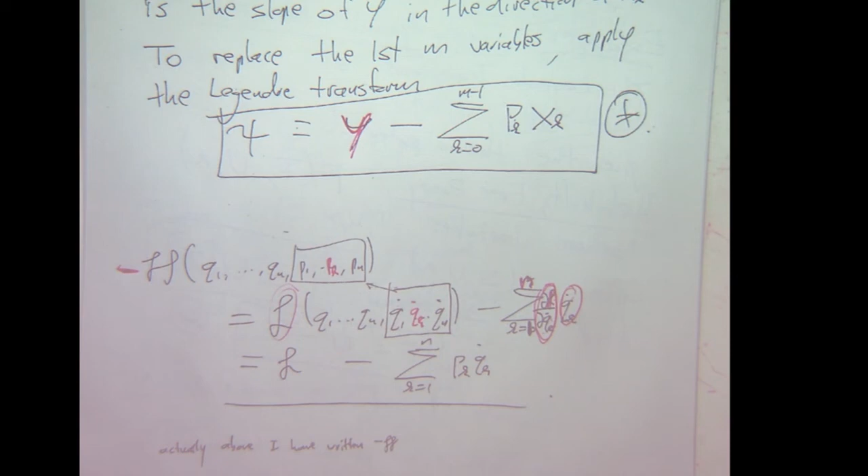Okay, so let's have a look at examples applied to thermodynamics. This is where thermodynamic potentials come from. We want to find the Legendre transforms of U of S, V, N. The Legendre transform of U(S,V,N) gives the thermodynamic potentials, so the first one is the Helmholtz free energy.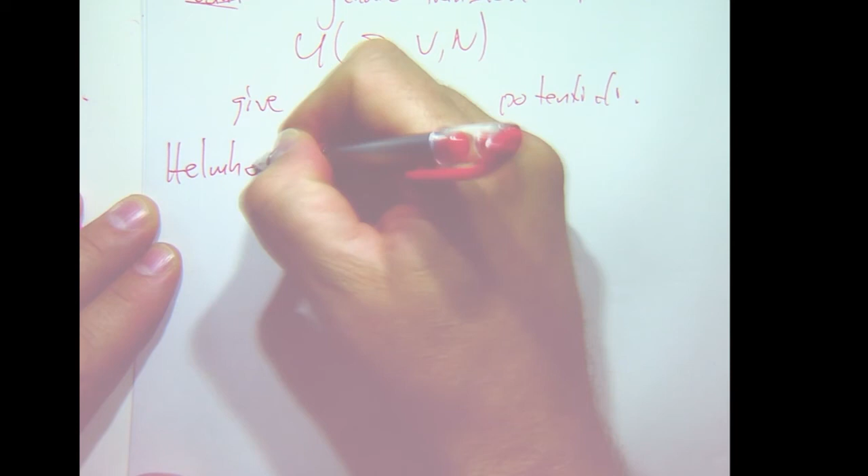Has anybody heard of the Helmholtz free energy before? Where did you hear about it? Gibbs free energy, Helmholtz free energy, where have you seen those before? Chemistry? Yeah, okay, so this is where they come from.

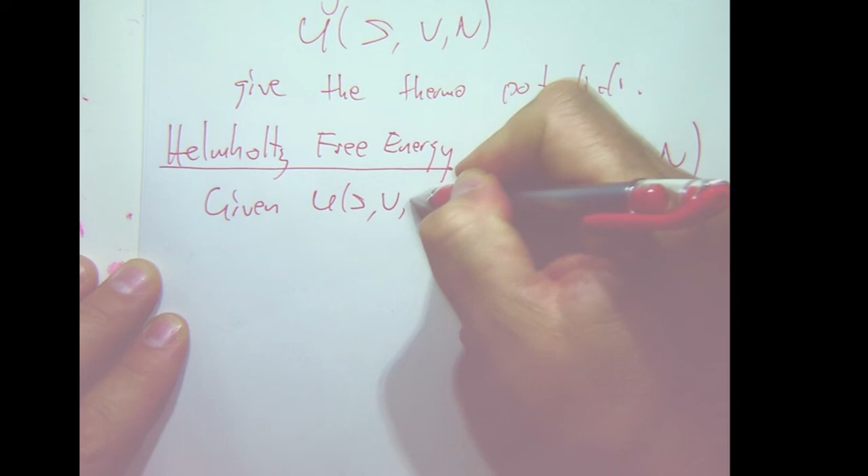So F(T,V,N). The natural variables are T, V, N. So what's happened is we've replaced S with the slope of U with respect to S. Given U(S,V,N), you find T equals dU/dS at constant V, N. That means temperature is a function of S, V, and N. And then you write the Legendre transform.

So you start off with the function U, you subtract from it the slope, the derivative of U with respect to S, times S. That's F. And then you eliminate U and S in favor of T, V, N.

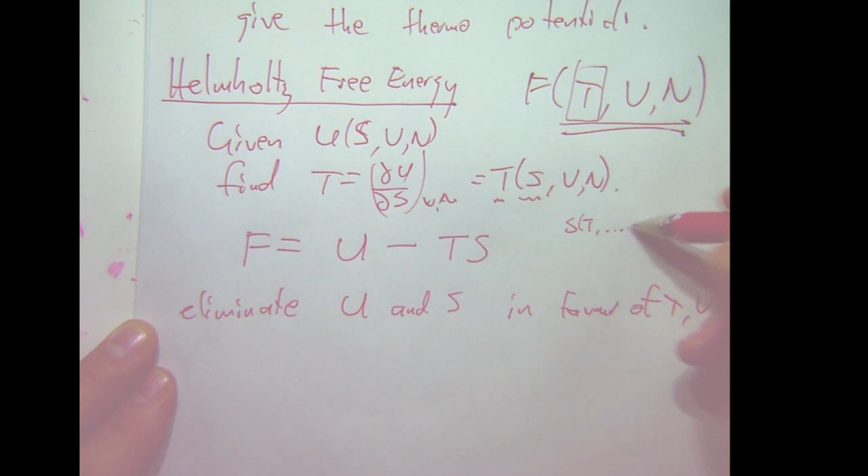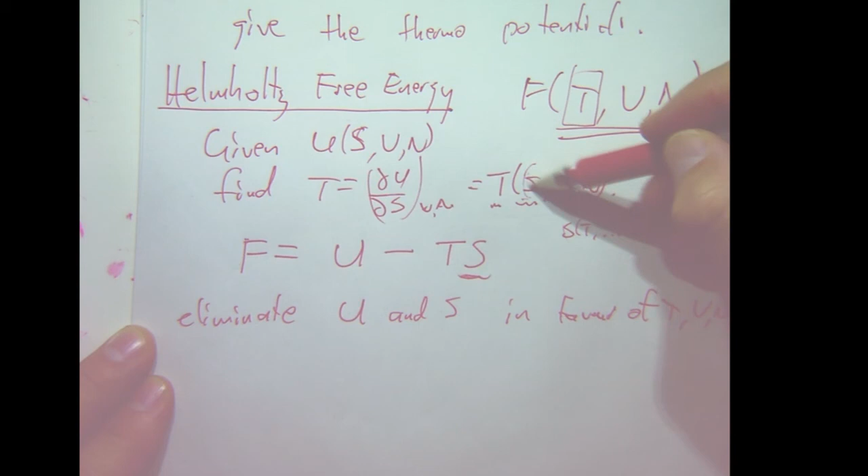So here this gives us T as a function of S. If I invert that to get S as a function of T and V, N, and substitute that into there, I would get U as a function of T and other things. That means I have T squared times V times N, something. S has disappeared. Substitute that in, I get an expression involving T, V, N only. S here has been inverted, so S is a function of T, V, N. This thing here is a function of T, V, N. So all that's left is some combination of T's, V's and N's. So you've got F as a function of T, V, N only.

But Professor, we can't do the same for two variables, as in I can't have T and P? Sure you can. But then how would I write the S? We're getting to that. This is Helmholtz free energy, just wait.

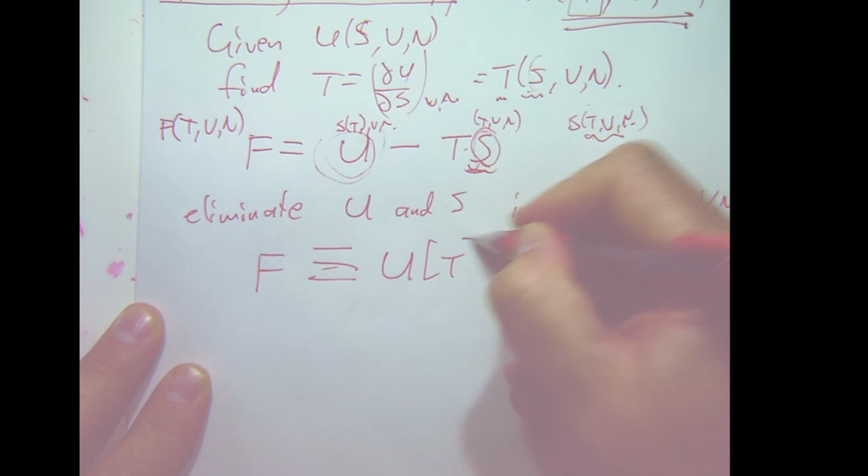So now there's a nice way of denoting this Legendre transform. The Helmholtz free energy, you can denote by putting three bars like this to mean U in square brackets T. So this means the Helmholtz free energy is the Legendre transform of U, where the variable T replaces the appropriate variable.

Now dF, F is a function of T, V, N, so dF equals dF/dT at constant V,N times dT, plus dF/dV at constant T,N times dV, plus dF/dN at constant T,V times dN.

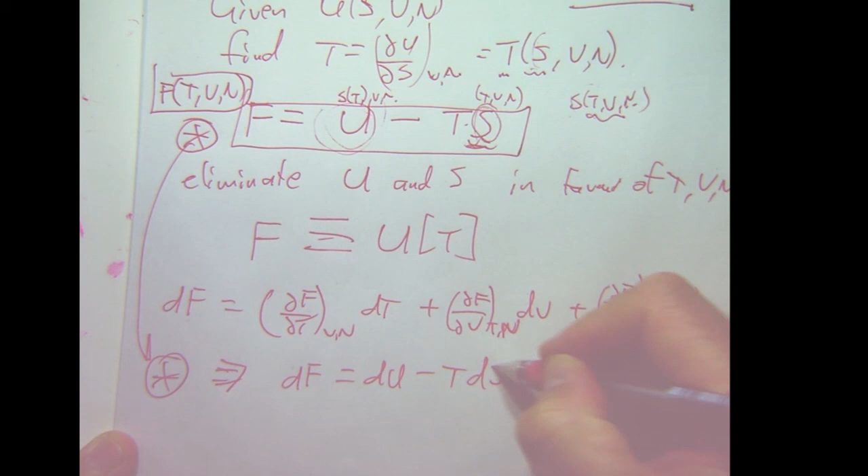And also from here, the differential dF is dU minus T dS minus S dT. But dU is T dS minus P dV plus mu dN. Here we have minus T dS minus S dT, so T dS cancels. We have minus S dT minus P dV plus mu dN.

dF. It's also important. Okay, right.

So the next one, we want the Legendre transform of U where we eliminate V in favor of minus P, and that's going to give us the enthalpy. The enthalpy is a function of S, P, and N. It's called enthalpy, another favourite potential that chemists use.

That means you're replacing V with minus P. So H, you start off with U, you subtract the slope of U with respect to V times V. So that's U plus PV. In other words, given U(S,V,N), you find the equation of state, minus P equals dU/dV at constant S,N, and that's a function of S, V, N, that derivative there. So here you can eliminate, that's like a known function. If you're given what U is, you take the derivative, that's some mix of S, V and N.

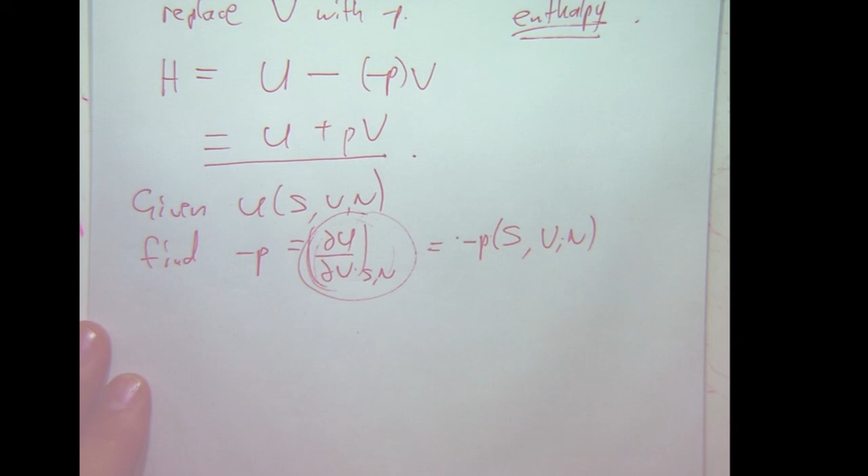So you invert the P function to get S as a function of P, V, N. Should be V as a function of... oh sorry, V is a function of S, P, N, that's correct. And substitute into, so here U is a function of S, V, N, and V, so you get V is a function of S, P, N. So put that there, and then V is a function of, and put that V into there. So all you're left with is some combination of S, P, N there and S, P, N there. So H turns into a function of S, is a function of S, P, N.

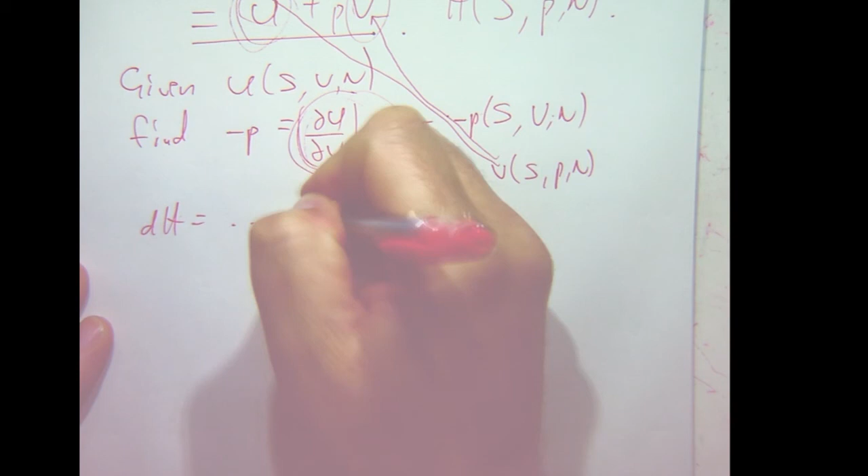The H equals blah blah blah. So you can do that as an exercise. You're going to do it about 1,000 times anyway, so you can do it now.

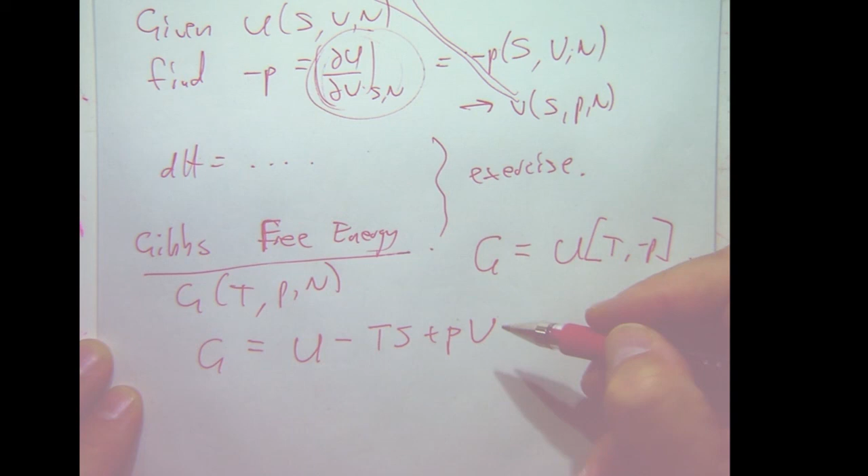Gibbs free energy. What's the Gibbs free energy? It is the Legendre transform of U, and it's T and minus P, so it's a function of G is a function of T, P, N. So the Legendre transform that gives G is U minus TS minus, minus P, so it's plus PV. That's the Legendre transform.

And so dG equals, and you can do an exercise. So then using the equation of state, using two equations of state, eliminate U, S, and V, and so you get this thing here. So G is a function of, eliminate that in favour of T minus P, and basically get that.

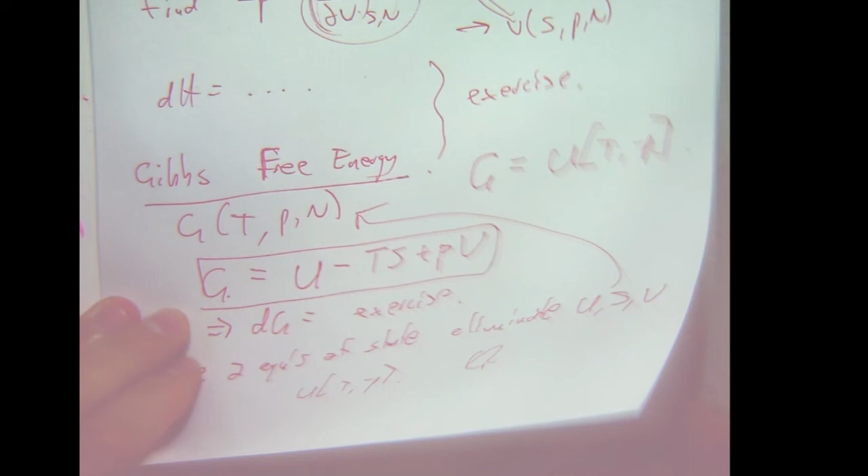The last one, I mean, there are many types of potentials, many potentials that are useful. Zemansky and Dittman have a page with a list of about, I don't know, 10 or 12 of them, and they tell you the physical situations where they're used. Very nice table.

But the ones that we use, these are the ones that we use most often. And there's one that we'll use when it comes to talking about chemical reactions or where numbers of particles change, or where a system is in contact with two systems with two different chemical potentials, and then you get equilibrium with particle exchange between them.

So something like, for example, there's a bottle, and it's at the bottom of the sea, and initially the bottle has fresh water in it, and the seawater is salty. So there's an exchange of salty water and fresh water, two different chemical potentials which are driving the exchange of particles. Eventually, equilibrium is set up where the chemical potentials are equal. That gives you the equilibrium concentration of salt in the water.

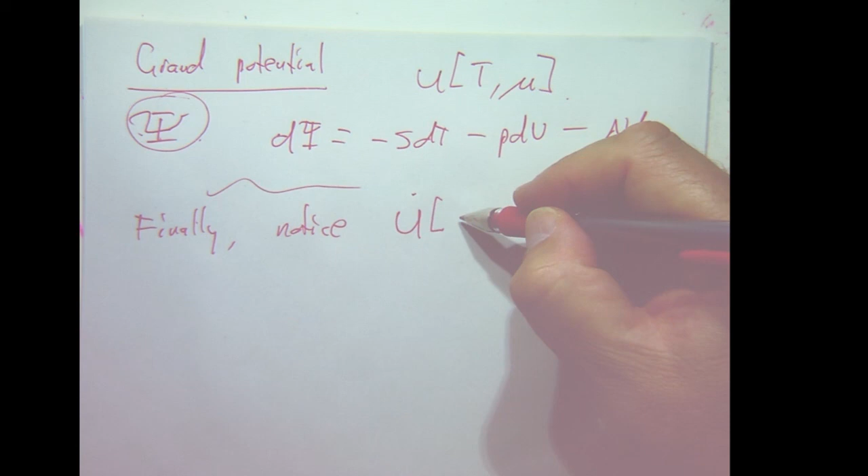But finally, so this is the grand potential. It's very important in statistical mechanics. And finally, notice what happens if we take the Legendre transform of U of T, P, mu. So we substitute all the extensive variables with the intensive variables. So what happens is that...

Equals, so what's that? U, start off with U, and we subtract T times S, plus PV, minus mu N. And what do you think that is? Or what do you think that's equal to? Zero. Zero, very good. That's zero because of the Euler equation.

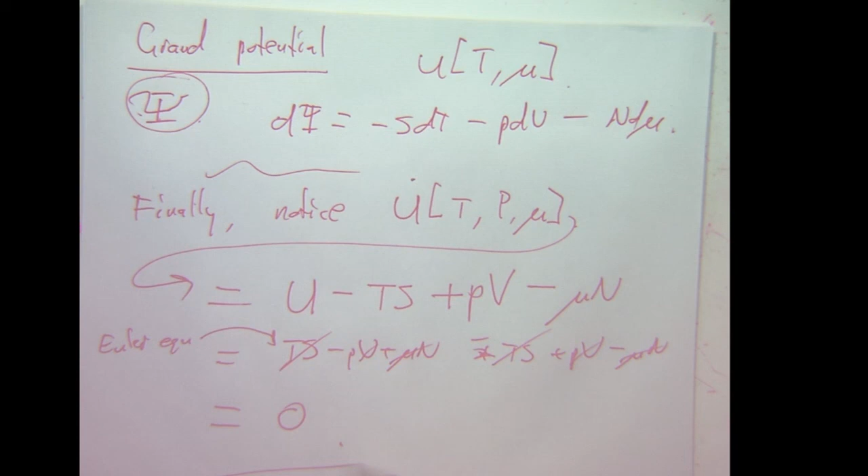U is Ts minus PV plus mu N... plus Ts, oh sorry, minus Ts plus PV minus mu N. Ts cancels, PV cancels, mu N cancels, and you get 0. So if you Legendre transform all the variables, you get 0.

And what is that term? No, it tells us, depends on what you're looking for. That I can't write the function in terms of T. It's telling us, don't get too enthusiastic about Legendre transforming everything. So you can't find the function, you need an extensive parameter. You can't express it only in terms of intensive parameters, otherwise you get 0.

Well, this is limited to situations where there are only three variables to start with: S, V, N. There'll be a differential geometric interpretation of this that will answer your question. It depends on what sort of question you're looking for, what sort of answer you're looking for.

All right, so next week we'll look at the physical meaning of these potentials and some applications, next week and the week after.